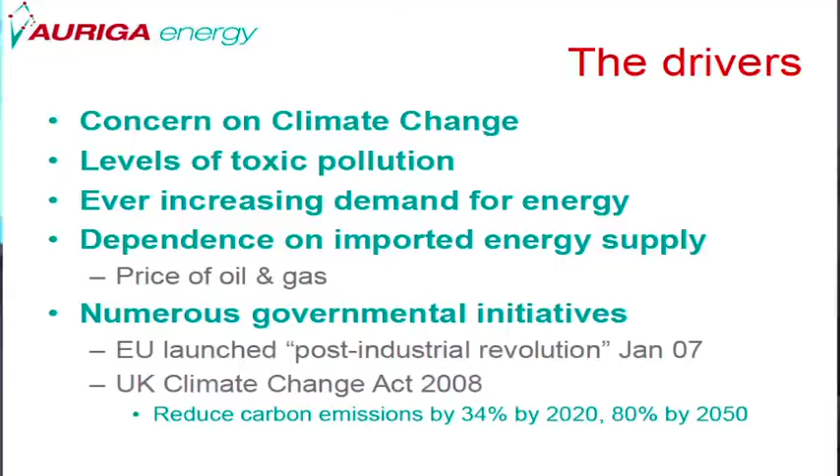So the governments have recognized this, and I left my day job at the end of 2006, and Jose Manuel Barroso must have heard about it, because he got up on the 12th of January 2007 and said he's got to help me out. He launched this post-industrial revolution to start what he said would be the green industries for Europe in the future, because we need a new industrial revolution, because all of our traditional jobs and industries are now migrating naturally to parts of the world where they can do them much easier, much cheaper, and not worry about health and safety all day long.

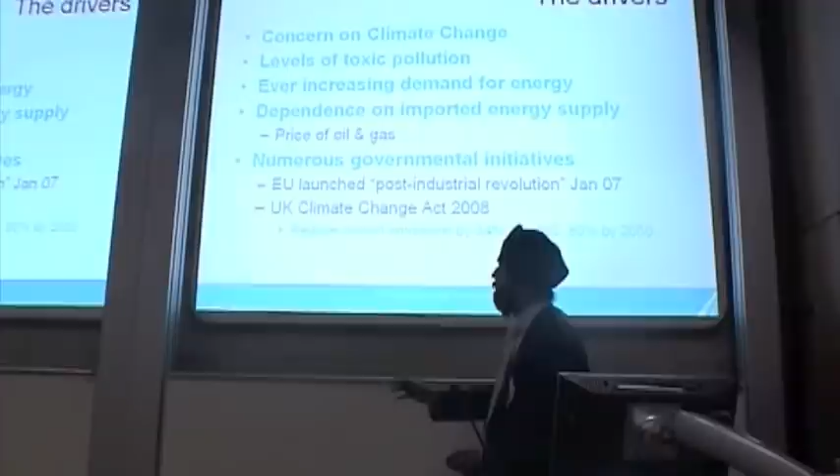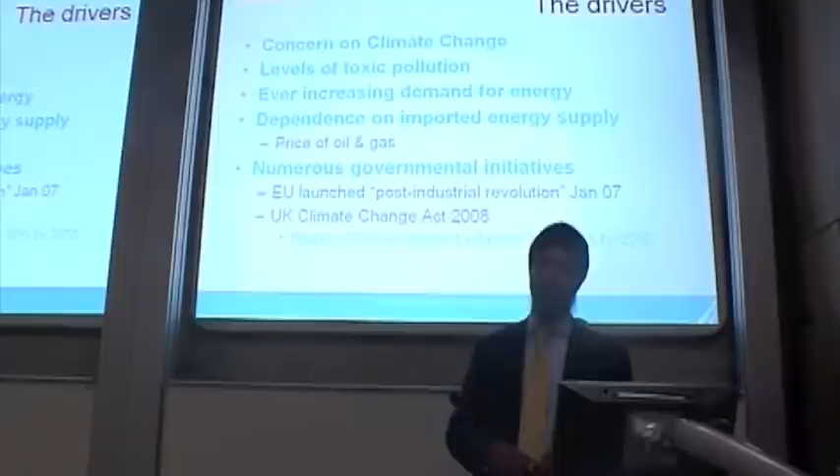Following on that, in the UK, we passed the Climate Change Act in November 2008, and that gave us these numbers that we got to meet: reductions in carbon dioxide output by 80% by 2050, far enough away not to worry about it. But 34% by 2020, all very easy when you're in a recession, because everybody's industries are switched off and things are down. But if we get our normal growth back, that's a nightmare. That's very difficult to achieve. So we got to, as Rex just said, get out there and do something and actually do the business. So here we are.

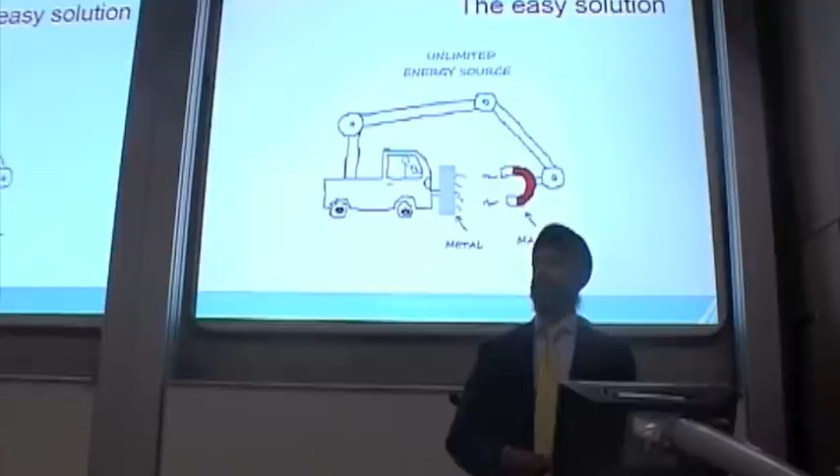The answer is easy. I don't know why anybody doesn't follow the answer. And being in the materials and metallurgy department, I think I'd get on with it.

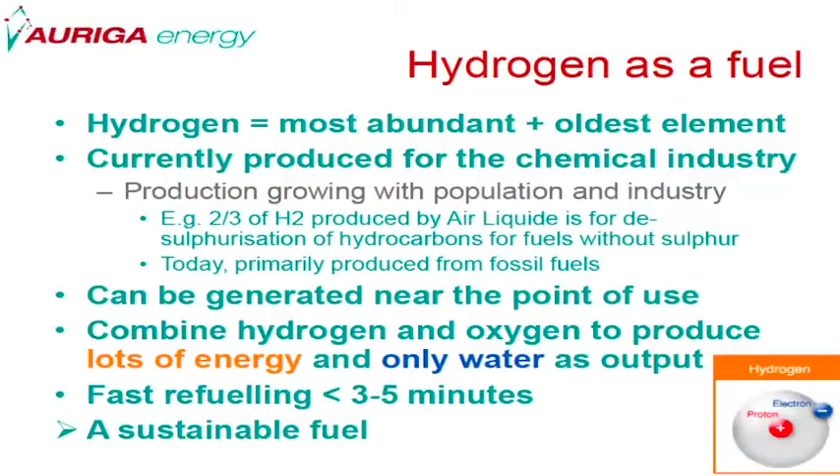So hydrogen is what we're talking about, and it's the most abundant element in the universe. There's plenty of hydrogen. We'll never run short. We won't have to fight wars to try and get hold of it. All the gas companies tell me is that the hydrogen that we consume, that I buy from them, that you buy from them now, is in essence a byproduct of their other industries, of the chemical processes in the chemical industries and in the oil refining industries and the fertilizer industries and all that. So in principle, there's no such thing as manufacturing it separately. You could almost, because it would go to waste if we weren't using it, capture it for free if you turned up at their refinery and put a little jar over their flare point. Is that right, Stuart?

Perhaps not. Anyway, ITM will tell you in a minute, later on this afternoon, that you can generate the hydrogen at the point of use by having your electrolyzers there, and then using wind energy and solar energy and waste recycling, which is my favorite, by the way. And you know about fuel cells, you combine hydrogen and oxygen and you get water as exhaust, so there's nothing difficult about that.

So to me, it is a sustainable fuel, and it maintains the versatility of the current fueling systems of oil-based diesel and petrol. And we're talking electric boats, when you talk about electric vehicles, somebody should go and look at the film Who Killed the Electric Car? And it's the oil companies, the most powerful entities on earth. And they're not bad people.

I know a lot of people who work in the oil industry. They're friends of mine. They're just like us. They're doing a job. They need jobs. So you don't want to put them out of a job. You want to change their mode of operation so that they survive. Their distribution networks survive. They manufacture hydrogen. All the versatility of a car and a boat and everything else is maintained. It is a sustainable fuel. So that's why we're doing this.

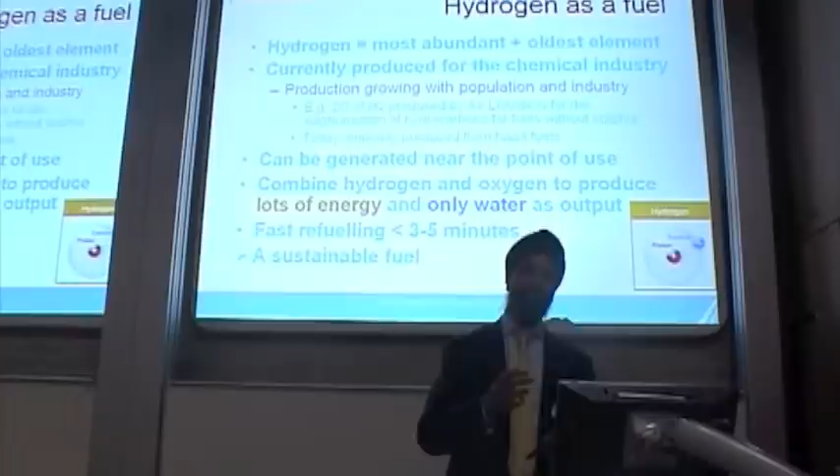What are the key challenges? Well, it's the old chicken and egg. There's no one manufacturing enough hydrogen, and we can't deliver it. There's no supply infrastructure because there aren't any products to use it. We don't have a supply chain, and as was mentioned earlier on, the marine industry does not have people with screwdrivers. They have people with spanners. Simplistically speaking, we need a service industry who can handle hydrogen, the fuel cell electrical systems, and be able to maintain them and repair them.

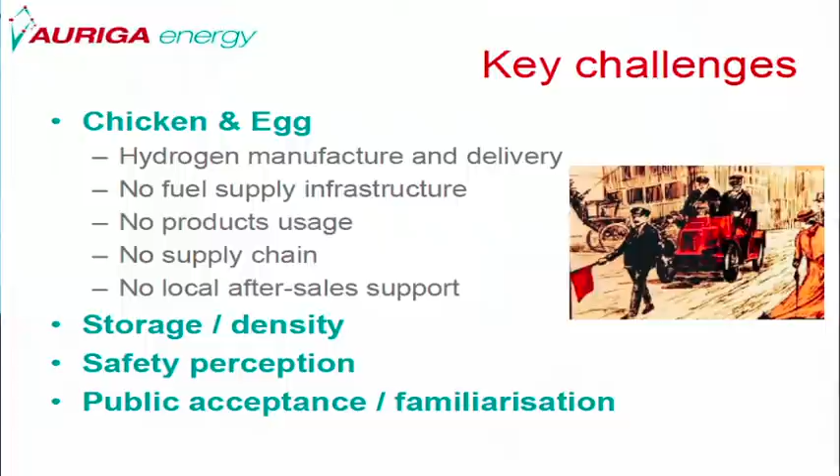Rex's business and the business of this department is sorting out the storage and storing hydrogen in a good density. That's beyond my capability, so I leave that to the experts there.

And the safety perception - we are always worried about anything new, and there's a public worry about safety of hydrogen. The Hindenburg gets mentioned when nobody else can come up with any rational argument, so you slap your hand over your forehead. We've got to bring the public up to speed and make sure they're familiar with these new technologies we're deploying. So bearing that in mind, I came up with this project idea to get it out there and bring it to the public so they are comfortable with it.

This is where I perceive we are at the moment - we're at the red flag. In building my hydrogen systems and trying to get them out there, it's taken years to get to this stage. I keep coming across people who say we need people walking with red flags in front of you because this is really dangerous, we shouldn't have it. So what we've done is produce our hydrogen fuel cell systems and target them for a variety of market areas where I find there will be good traction to get it out there in public and make sure that it picks up.

And the first one is for use on the water, in the marine industries for ferries and canal boats. I lobbied hard with Bristol City Council since 2003 and finally got them to issue an ITT. We put in a bid and we won that, and we are here building the fuel cell ferry. I'll talk about that in a minute.

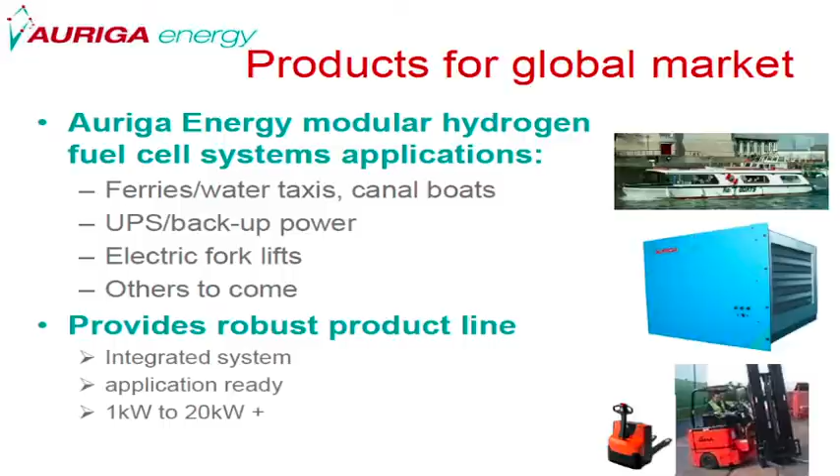In parallel, we've been developing our UPS backup power systems, which we launched earlier this year in January, and they're out there in operation. We're working on electrical forklifts and other products to come.

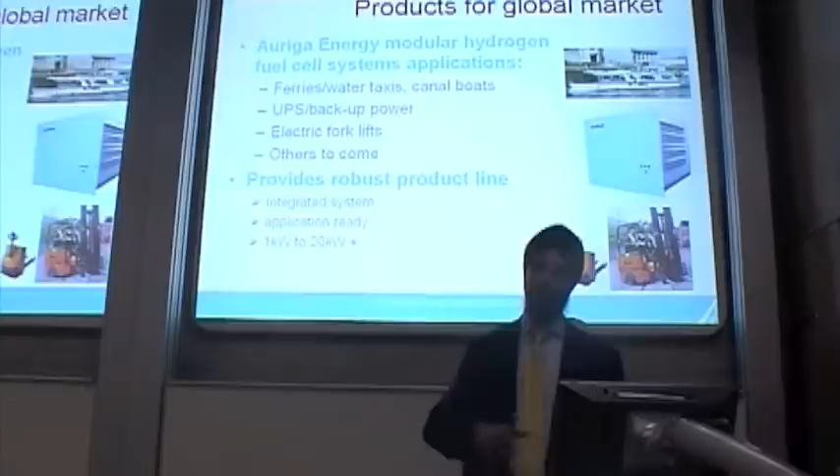So we're building our fuel cells - I said 1 kilowatt, but we're actually down to 0.5 kilowatt now because a particular customer demanded it. We've got a modular system which builds from 0.5 kilowatt upwards, and we're in discussion with a customer. When it gets up to somewhere near 100 kilowatts, then we're struggling, but that's about the limit of our system as currently defined - we build up the modules.

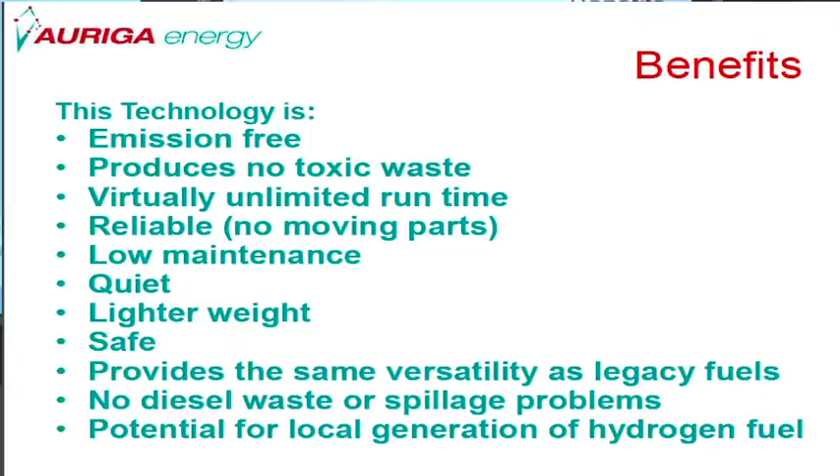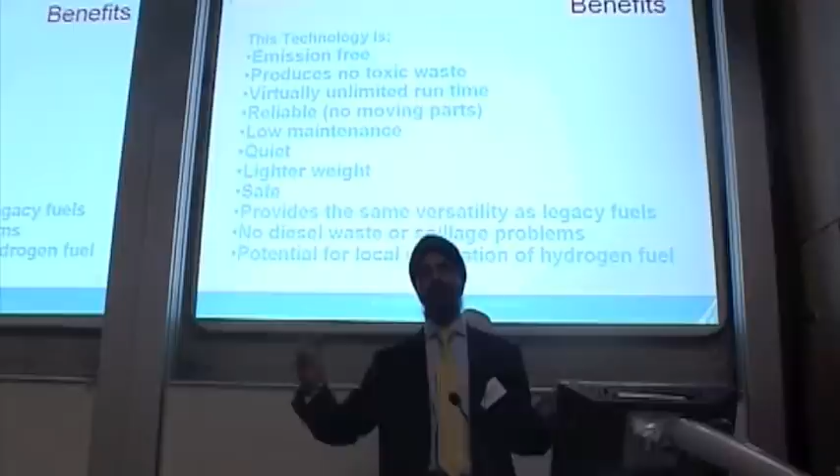So what are the benefits? You know about this, I'll quickly run through them: emission-free, no toxic waste, gives you the versatility of current petrol and diesel systems with refueling, virtually unlimited run times. Reliability was mentioned earlier this morning, and fuel cells are reliable in that they work, but everything - this laptop, this microphone - has a lifetime. So at the moment the challenge with fuel cells... actually I don't think it's a challenge because some of the fuel cells we use now do produce a long life. But the general challenge for the fuel cell industry is that the number of hours they work is considered limited.

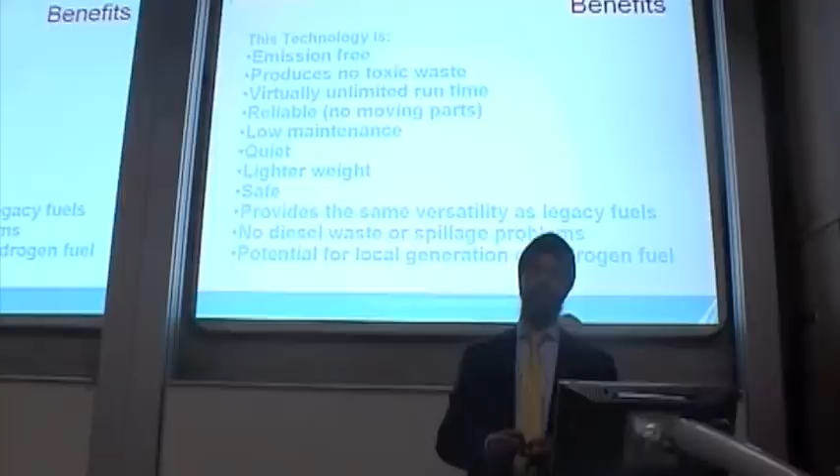But then they can be easily recycled and replaced. There's low maintenance, no moving parts to replace. They're quiet, of course, being electrical systems, and lightweight - which is a pain for trying to put them into forklifts where battery systems and engine systems are currently used as counterweights. Also in the boat industry, we put our kit in the boat and say, hang on, this is now a little too light, we've got to balance it out, put some ballast in, and to get it under that bridge we need it sitting lower in the water. So it's not always a benefit to be lighter.

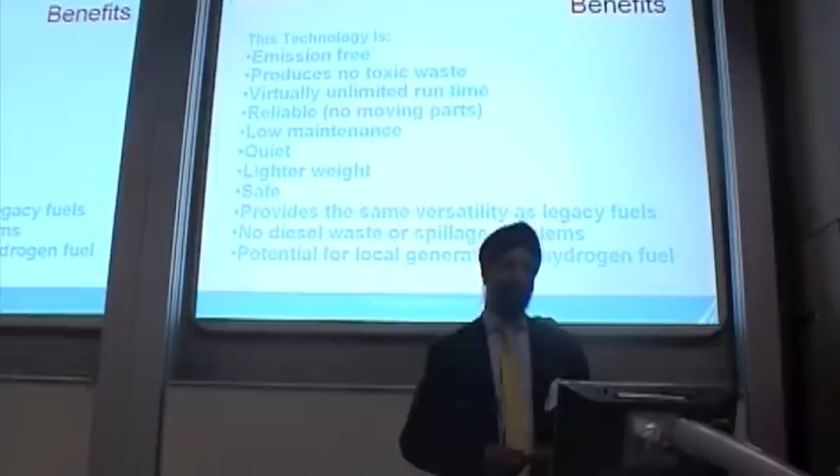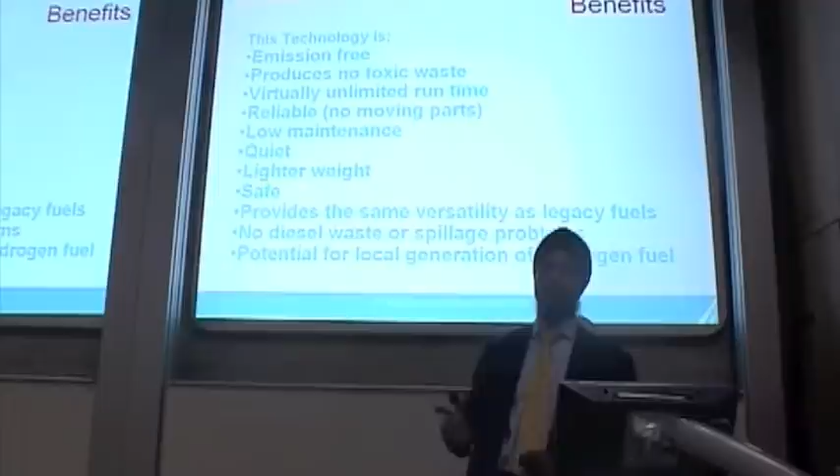Safety - well, they are safe. And I'm glad to see that everybody was out there looking at the 3 or 4 fuel cells that are operating out there, and nobody's panicking and running out the door. So we're all obviously comfortable with the safety of these systems. Well, I've said the rest, so let's move on from that.

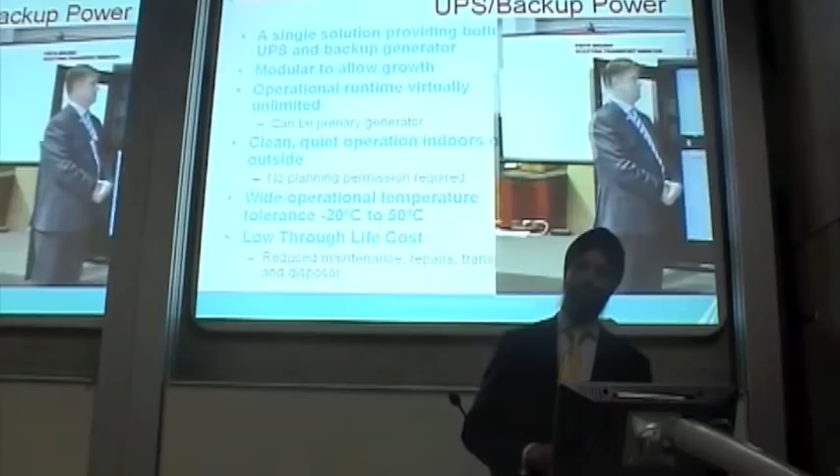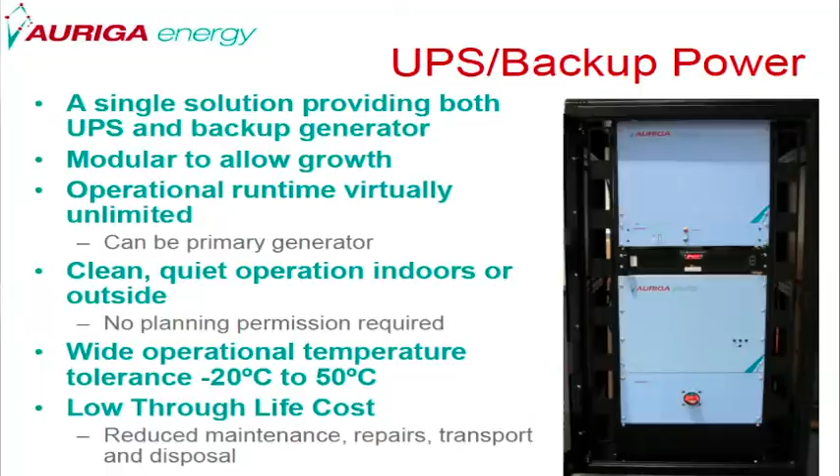So this is our backup power system, which we launched with our partners, Linnet Technology, UPS installers, in Stirling at their headquarters back in January. It's mounted in a UPS in a 19-inch rack system, and what you see there is 3 kilowatts, giving you all of the benefits I've outlined. And we've done the cost analysis - if you analyze these systems on a through-life cost basis, the costs are comparable with the systems they're replacing.

So we're talking waterways.

When the world talks about worrying about global warming and CO2 emissions, people talk about trying to stop you flying, stop cars, let's stop flying, because that's the obvious visible emitter of CO2. But what's missing is that people have taken their eyes off the waterways and ports. If you stood on a hill overlooking a port, you would see a sulfur bubble, just as you would if you stood on a hill overlooking an airport or a city.

It's just a big yellow bubble. I've got lots of reports of analyses done of port pollution around the world, mostly in America, because they do a lot of analysis on these ports. This particular analysis done by the NRDC, the Natural Resources Defense Council in the US, looked at a port, I think it's Santa Barbara in California.

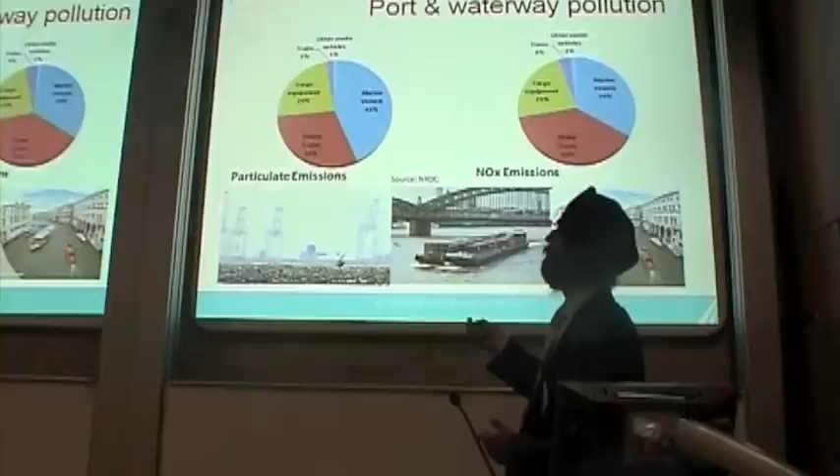Their analysis shows that marine vessels are polluting about a third of the particulate emissions, 40%, and a third of the NOx emissions. Then you've got the heavy trucks going in and out and the cargo equipment. And the thing that the general population and the politicians are focused on is that 1% - that's the cars going in and out of the port. So you're missing all of that and focusing on that. I think there's something missing here, and we're here to address it.

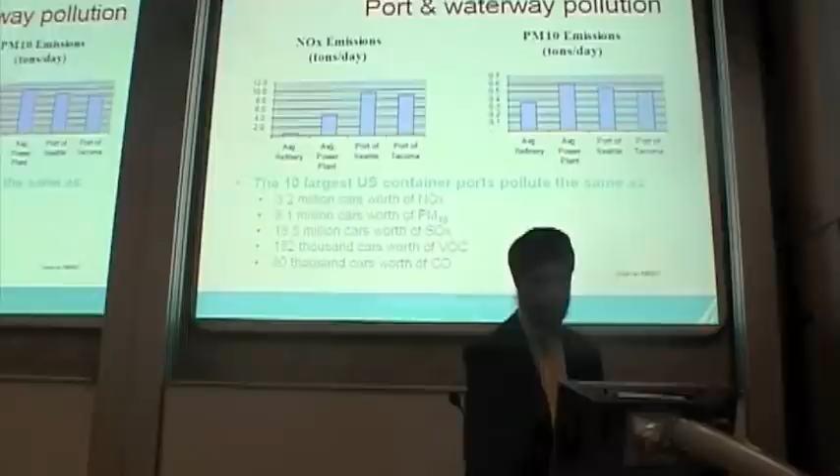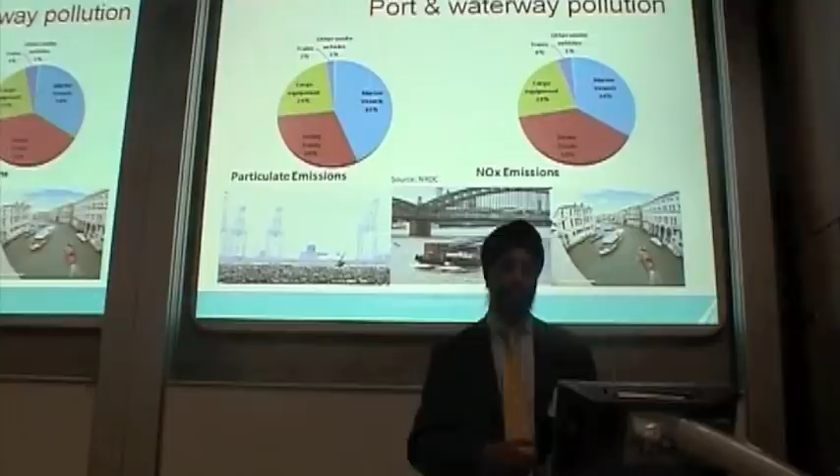There's also barges, and there's another report I have on the pollution level in the Rhine and the Ruhr. The Rhine and the Ruhr is used as an industrial highway for transporting goods in the industrial belt of Central Europe. So this is the analysis taken further.

So if you're thinking you're trying to solve a problem - the problem that the world is coming to an end because of global warming, temperatures rising 2 degrees, and we all fry - why not, rather than sticking to our political guns that we want to stop people flying and stop this, that, and the other, address the problem and say: where can we make the biggest difference?

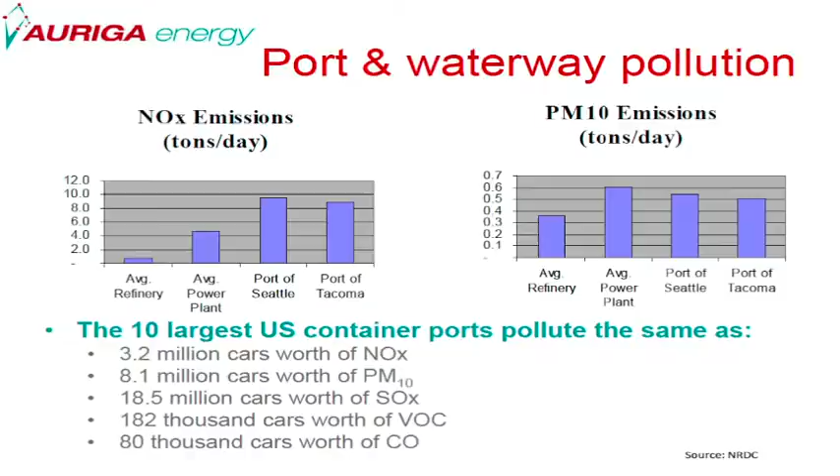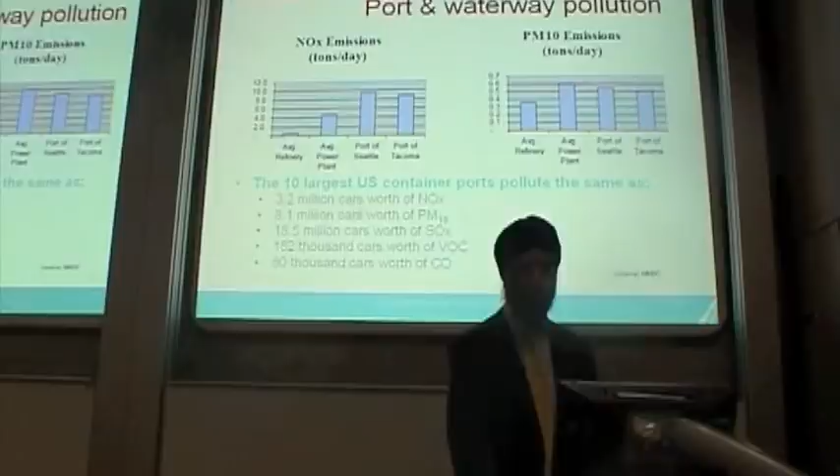So this is the analysis in America, and they're saying that if you sorted the problem in the 10 largest container ports in the US, you would achieve the same as changing millions of cars to a different type of fuel or different mode of transport. So that is what we need to do - address this point and solve it with a bigger step than the small steps we can do with changing people's mode of transport.

Then there are treaty commitments. The MARPOL Treaty, the Marine Pollution Treaty, was signed in 1973 by 125 or so countries, all the countries of the world that were there at the time. Annex 6 was signed in 2003, and that is a commitment by all the signatories that ships built after these dates will reduce their sulfur content to almost nothing.

Tier 1 countries are the rich countries, Tier 2 the intermediate countries, and Tier 3 the poorer countries, and they get up to 2025 to sort themselves out. The richer countries have to sort themselves out from now - this year, last year, and 2010.

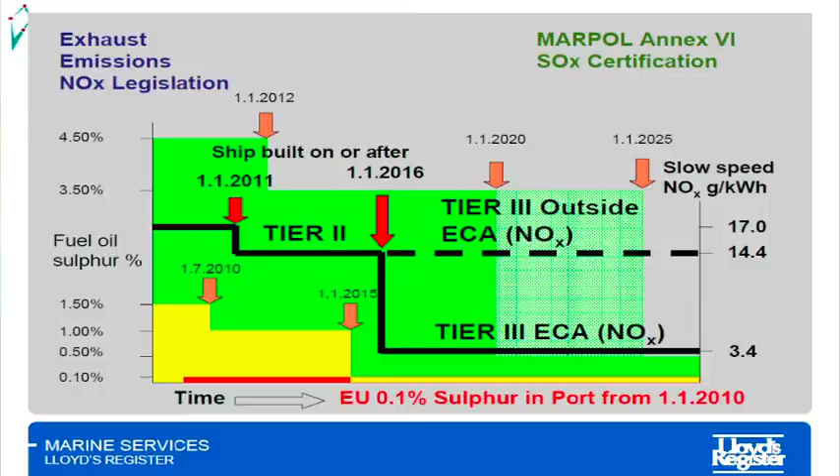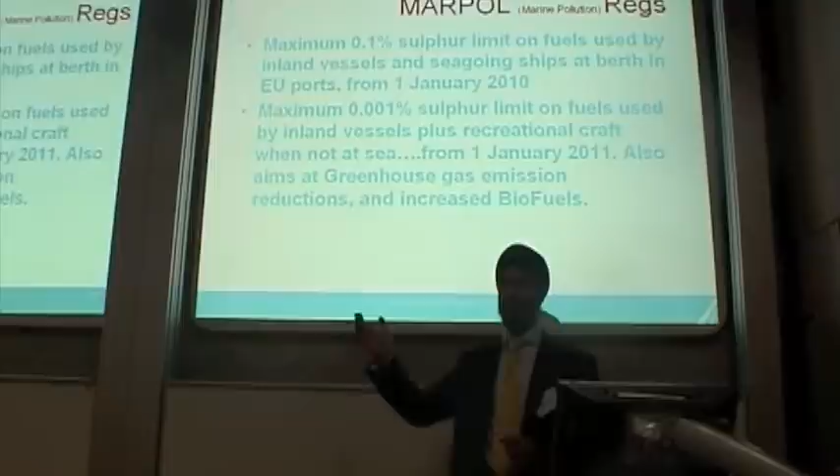And this is the exact wording of the legislation as it is written in EU legislation and in the UK legislation and every other EU country's legislation. These are the words that state you have to reduce them.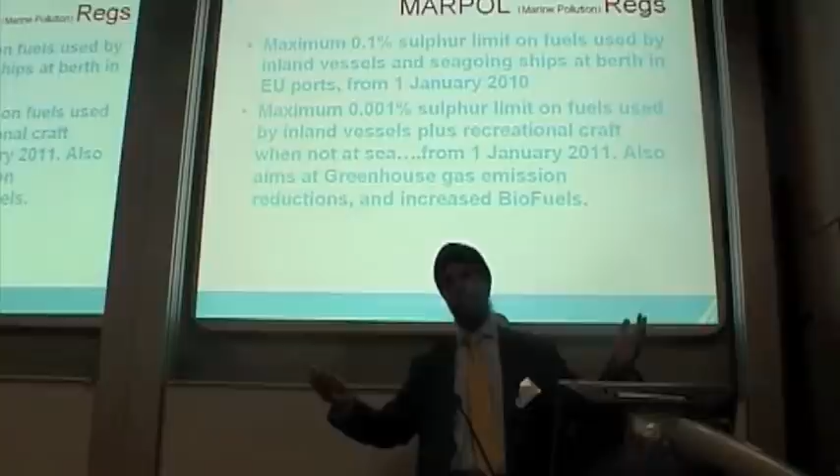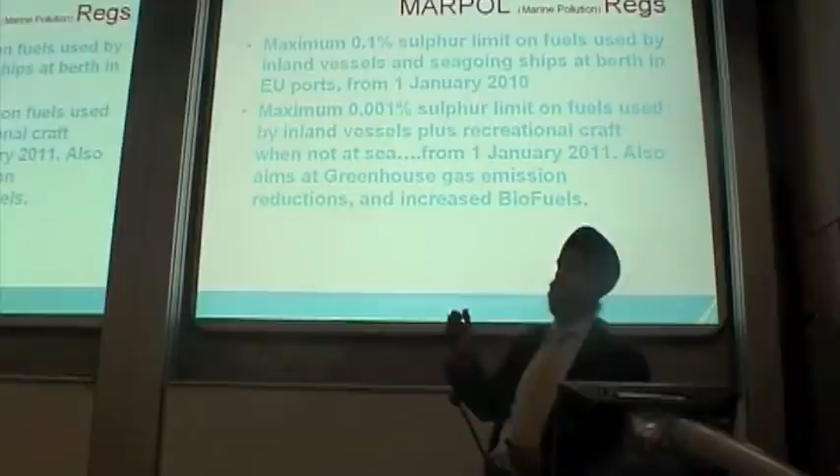And here where they've got the dots, that's me taking the words out, because there's an endless list of - what happens is people are looking for loopholes in the law. That's a list of all the cars and lorries and buses and tractors and lawnmowers, anything that uses ports. So they listed them all to say, oh, hang on, mine's not a ship, I'm okay, mine's only a boat. And I've had that argument with another guy - he said, oh, yours is a boat, so it has a different rule to ships. Yes.

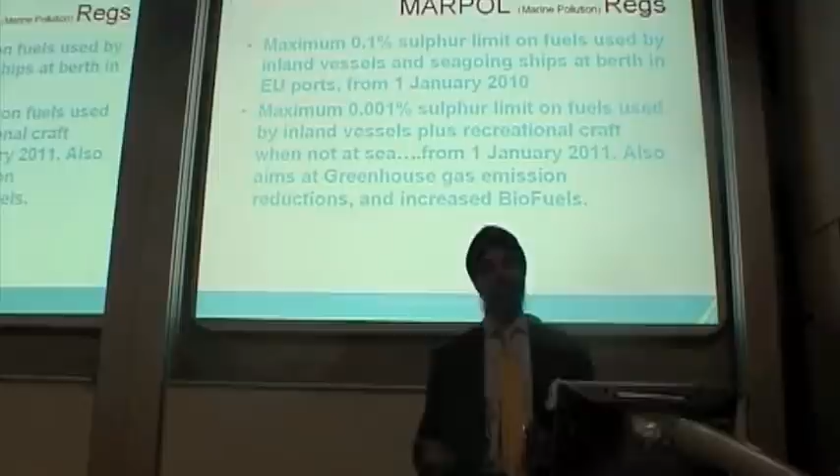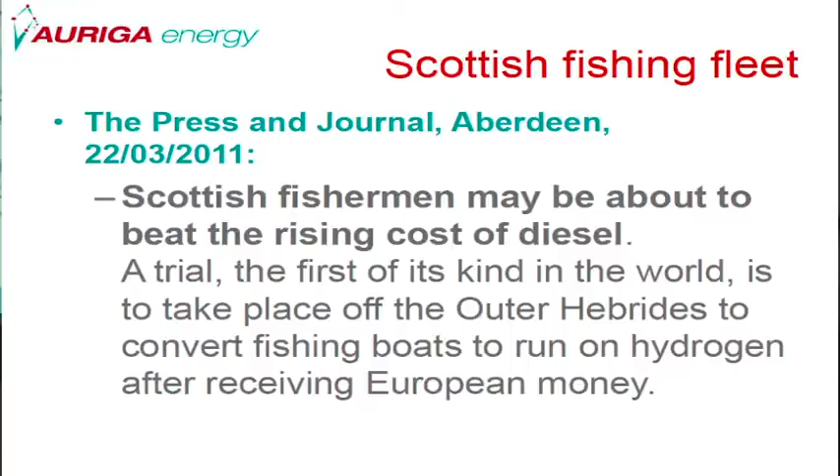And then there's the economic argument, and the fishing industry has been struggling for many years. All of my life they've been moaning that it's just too hard to survive. So with the increasing price of diesel, they've had a bit of a problem, and Scottish fishermen got a grant out of the EU to try using hydrogen as their fuel to reduce costs. So everybody is looking for some way out, and hydrogen seems to work. This is not putting fuel cells into their trawlers - this is burning hydrogen in their current combustion engines.

So we've got a problem to solve. How do we solve the problem? I say we find the quickest and easiest solution to the problem and keep a focus on where you want to get to. All the men cross their legs at this stage.

So the Bristol Hydrogen Ferry project is designed to demonstrate the viability of fuel cells in ferry operations - that's stop, start, and operations on a daily basis. The question was asked earlier, and Alex said that the Ross Barlow is only used for experimental work, they haven't done all this continuous running, stop-starts and all the rest. So this is where we will know how it operates in a ferry bus type operation.

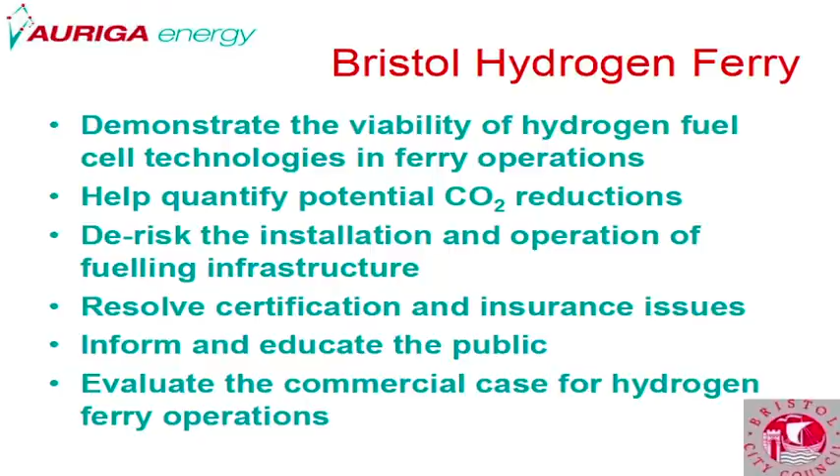Where you're going from stop to stop, picking up passengers, in all weather conditions. We want to quantify the CO2 reductions that we can make with this boat compared to the diesel boat that we'll be replacing, and then project that if all the boats in Bristol Harbourside were using this sort of technology, what is the potential saving? That gives the politicians we just had in the room a focus.

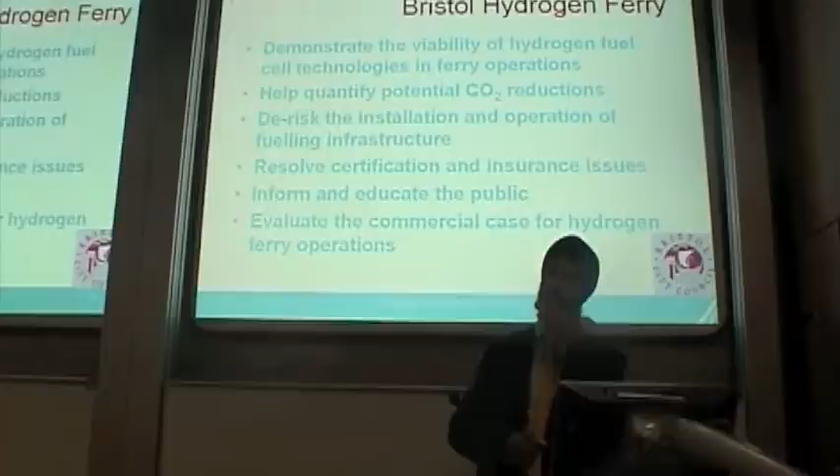There's something we can do here, we can achieve something. The biggest problem I've had is de-risking the installation and operation of the refueling infrastructure - where do you put the refueling station, how do you sort that out?

Then the certification - earlier on it was mentioned there are no certification rules, no insurance rules. You make a boat, you go online to whoever, money supermarket or wherever you get your insurance from, or when you buy a hydrogen car, you phone up Direct Line and say, I've got this hydrogen car, what's the insurance premium? And they'll say it's not on our list. So what is it? It's a hydrogen car. No, it's not on our list, sorry, can't insure it. Or we'll invent a number - how about £5,000 a year or something like that?

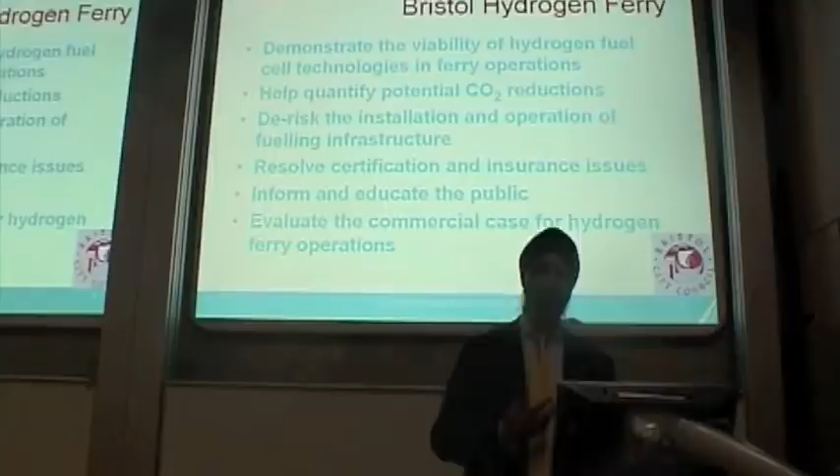So we need to resolve these issues, they're end-to-end, related issues. We want to inform and educate the public, and we want to build a commercial case for other operators in Bristol at least and elsewhere.

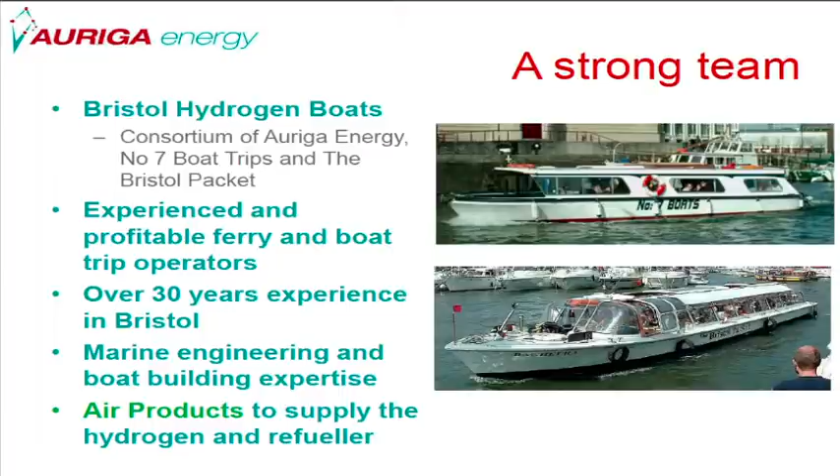So we brought together a strong team, and our joint company is called Bristol Hydrogen Boats, a consortium between ourselves, Auriga Energy, Number 7 Boat Trips and the Bristol Packet, who are operators of ferries and boat trips in the Bristol Harbour, and they've been there for many years. And Air Products came to us offering their services to supply the refueler, so they are partners in this project in supplying the refueling infrastructure.

Being a council-funded project, we can't afford very much, so that's the boat. It's a steel construction. We didn't have a spare boat that we could modify, and if you modify a boat, you take out its propulsion system, it loses its certification anyway, you have to recertify it. So why not build a purpose-built boat with all the right safety bulkheads and all the separations you have to do. It's sized for 12 passengers because the MCA, the Maritime and Coastguard Agency, has very strict rules.

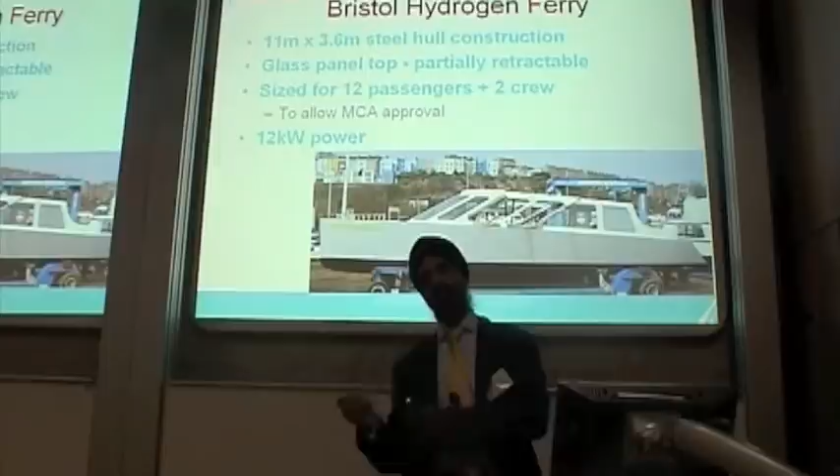We talked to them at the time of the proposal, and they said, well, we've got this set of rules, which is like a lever arch file that deep, for certifying boats greater than 12 passengers, and in there are hundreds of pages, and there is no mention of hydrogen, no mention of fuel cells, thousands of mentions of diesel and engines and things, so therefore they cannot certify it against those rules, and there are no rules for hydrogen. So chicken and egg - make it under 12 seats and then you can do what you like with it.

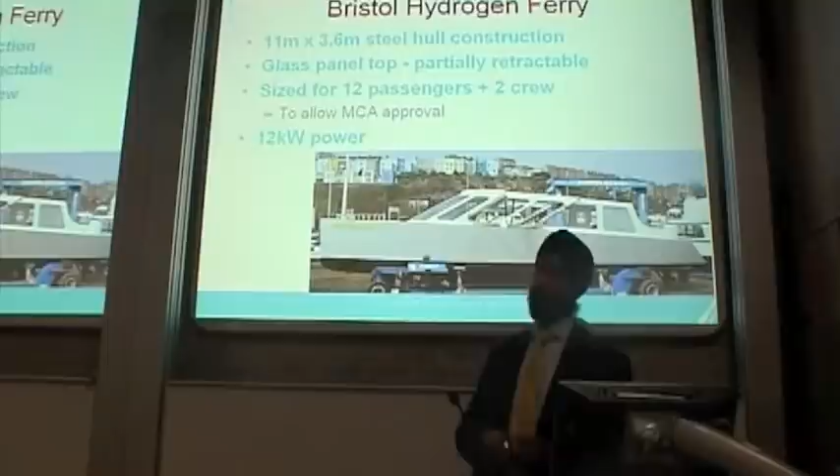It's a steel hull boat. We sized it to power 12 passengers, and we think it needs 12 kilowatts, so we're installing 12 kilowatts of our fuel cell system on there, and that is it.

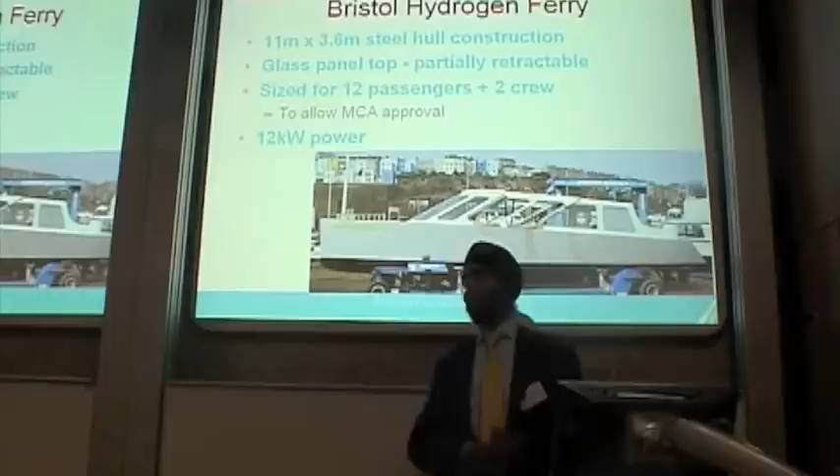It's a steel construction boat, just very close to its final fit out now. We're completing the system, and it should be launched sometime in July.

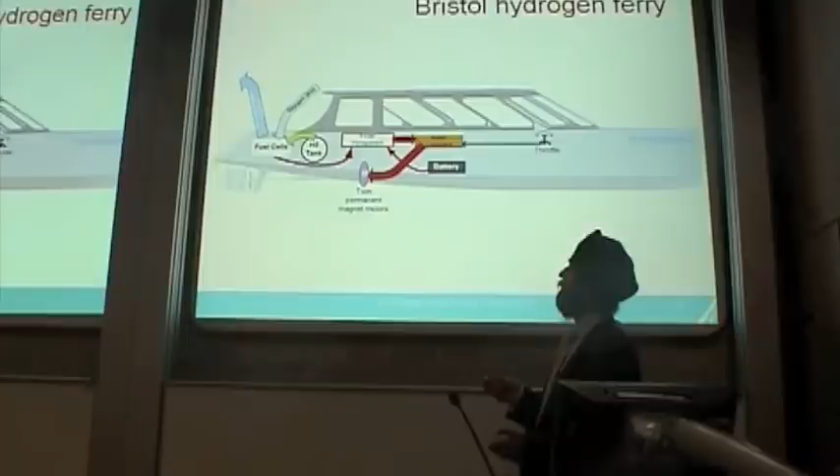That's the construction where we have our fuel cells in the back compartment. There are 4 times 3 kilowatt fuel cells, so it's 12 kilowatts on board. Got our air intake and our exhaust of the water vapor plus the purged gases, and a carbon fiber filament wound tank which holds 4 kilograms of hydrogen at 350 bar, so that we can use a standard - or what was a standard when we started this project - the standard car refueling kit, 350 bar, and we have room for a second tank in there, but we can't afford it.

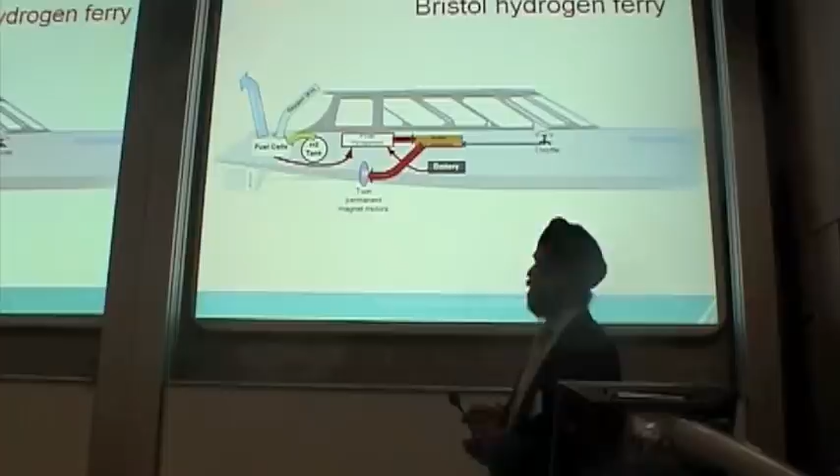We have our own power management system, motor controllers, and 2 Lynch motors, permanent magnet motors, which are powering the propeller. A battery for the buffer loads for the peaks and troughs, and of course we control it all from the front with our throttle. That, simplistically, is the Bristol Hydrogen Ferry.

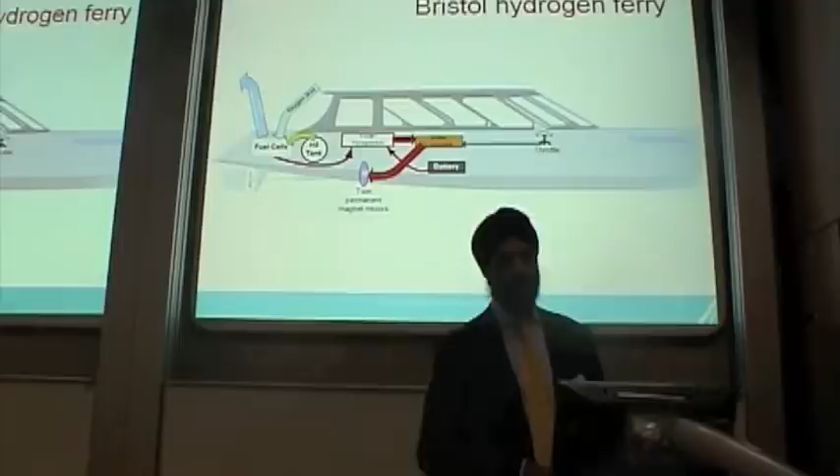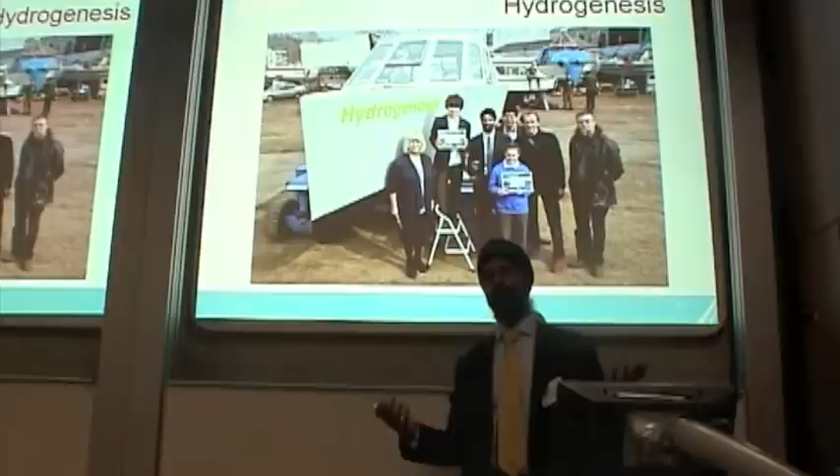We had a naming ceremony a couple of months ago. Being a council project, they ran a competition in all their junior schools, asking kids to put forward names for this project with a reason for the name. 142 names came forward, and we picked the one we liked: Hydrogenesis, suggested by this young lad. He won a prize and a certificate. His reason: Hydro for hydrogen, and Genesis being the first of.

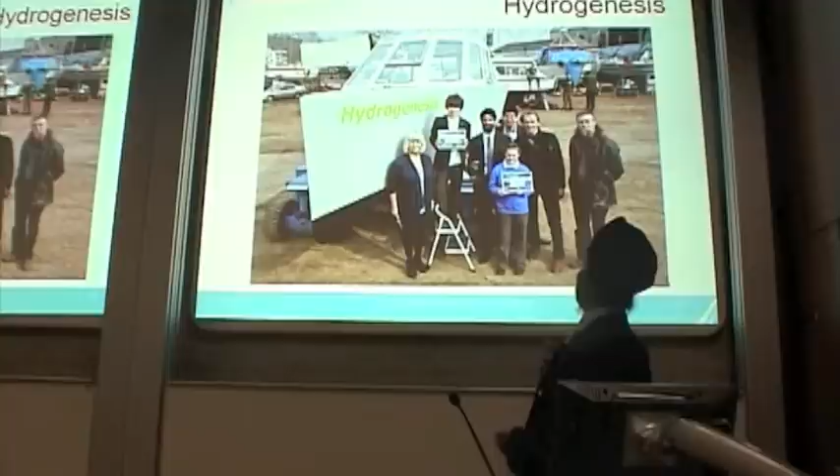Clever young lad. So we had this naming ceremony as the council leader, with my partners from the boat operators, the boat builders, and the representative from Air Products.

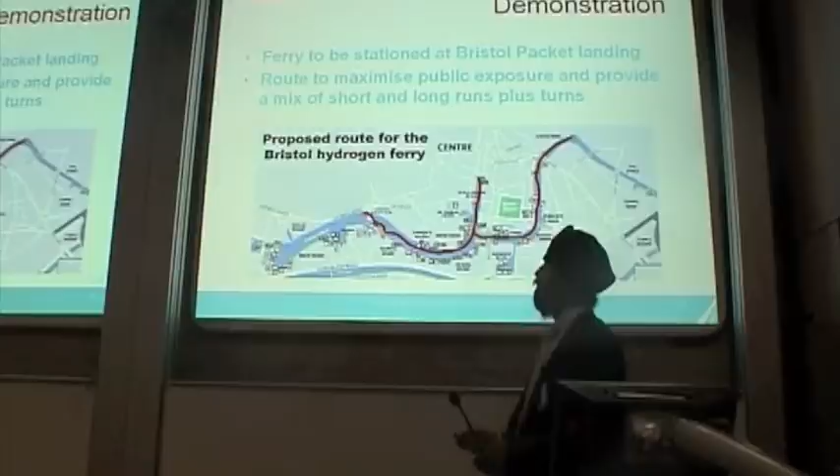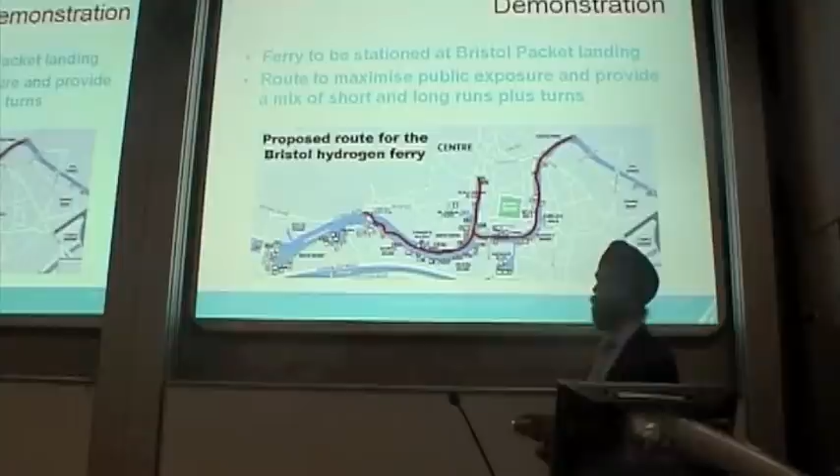Our demonstration route will be in the centre of Bristol, where we're operating from near the SS Great Britain, going round to the centre and up to the shopping area, going backwards and forwards on the daily ferry routes. The refuelling station is beyond here, just out there somewhere.

We've had some early success. The Sustainable Shipping Group gave us the Environmental Innovation of the Year award last year, which gave us a nice boost and some recognition. This group is composed of some big names - in the shipping world you've got Maersk Lines, Lloyd's, and numerous other big names. So we're getting the word out there, and these awards help with that, as well as boosting our confidence.

The challenges we need to overcome involve the refuelling location. It has to be in an area accessible by the public - we don't want it hidden away in some industrial no man's land. We want to educate the public and make them comfortable with it. I'd prefer it to be dual use, so we found a location with roadside access as well - if there were hydrogen cars, they could come up and use it too.

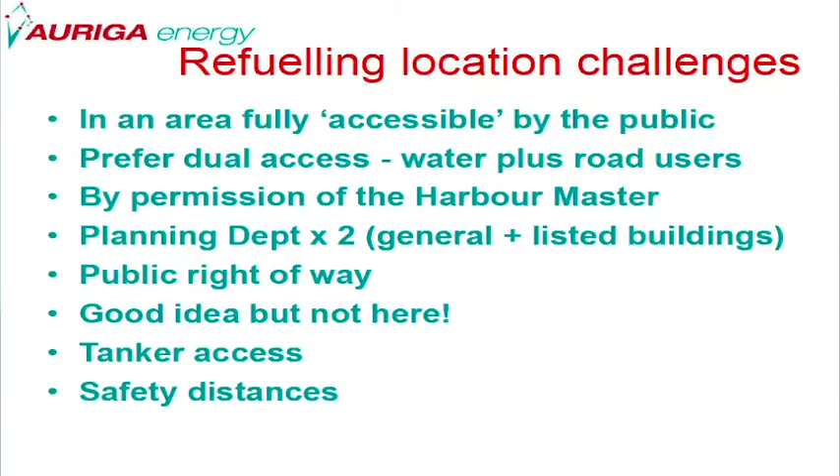Because if you don't have that, one boat doesn't provide a commercial case for keeping a refuelling station open, nor does one car. This is an unattended station - if you had to pay an attendant as well as ground rent and everything else, it's a dead duck. Everything has to be done with the harbour master's permission, since it's on the water side, which the harbour master controls.

We have to go through two planning departments in the council - a general planning department, and because it's a historic town with lots of listed buildings, even the harbour wall itself is a listed element, so we had to get through that too. And because it's on the riverside, any spare bit of land near the town centre is a public right of way - a path for walking your dog or having a walk yourself - so we're now blocking a public right of way.

In all these discussions I spent months and months going around talking to everybody. You give them a presentation, talk to them, and they say, brilliant idea, yeah, that's what we need to save the world in the future. Yeah, great - but not here though, can you put it somewhere else? So 'not in my backyard' applies everywhere.

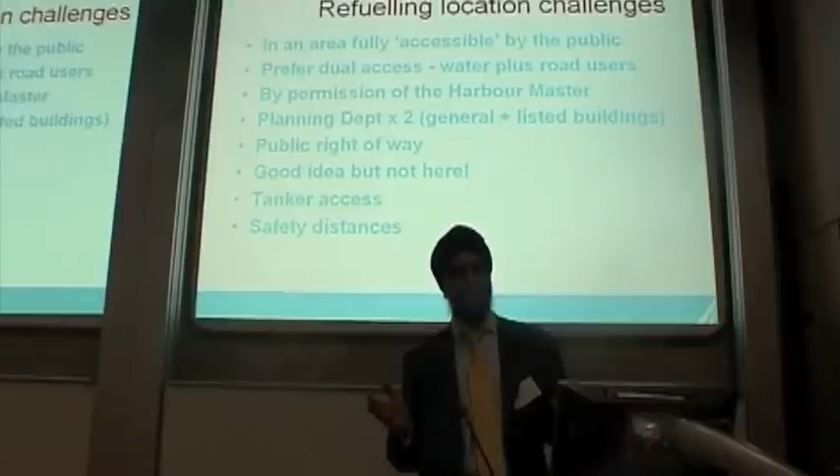Then there's the gas companies, and in a minute ITM - all these suppliers of refuelling systems have this fear of safety, and they like drawing big round circles around everything: 8 meters, 5, 10, 12 meter diameter circles. So you've got to find all this empty spare land to put this no-go area fence around, and then say, this is the future.

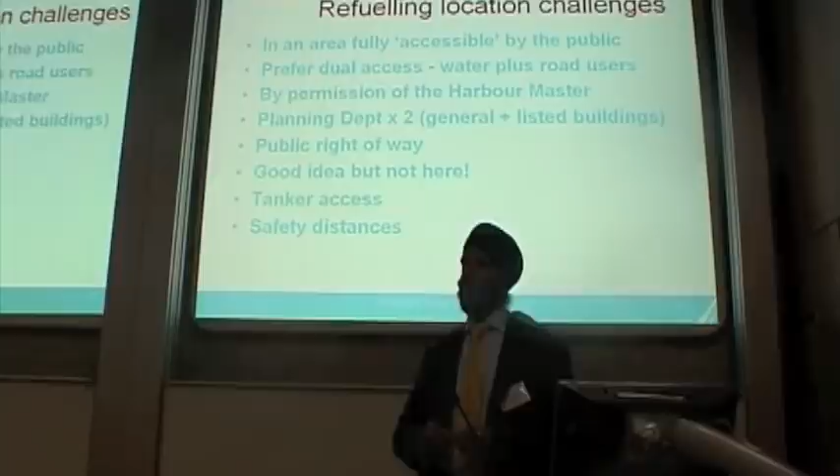I'm glad we were out there with 3 gas bottles being used, and none of you were screaming that there isn't an exclusion zone around those gas bottles. Thank you, Stuart - you yourself showed great confidence having your gas bottle. But if your guys were installing that gas bottle for me, they'd put a 3-meter exclusion zone around it. These are the sort of challenges we have.

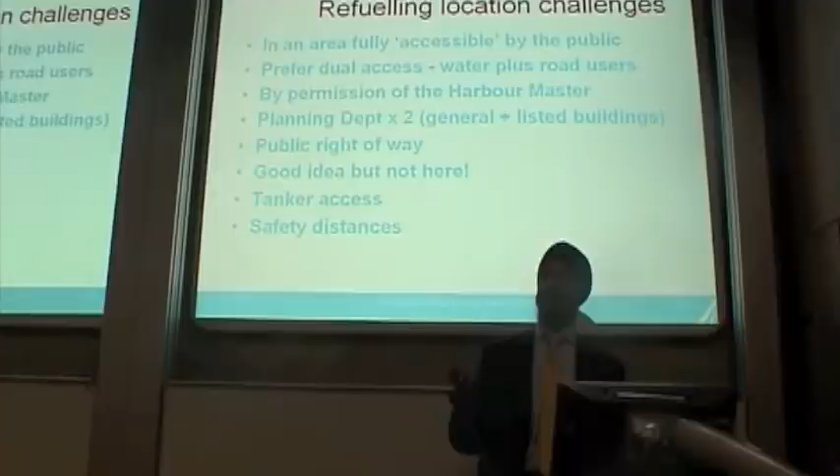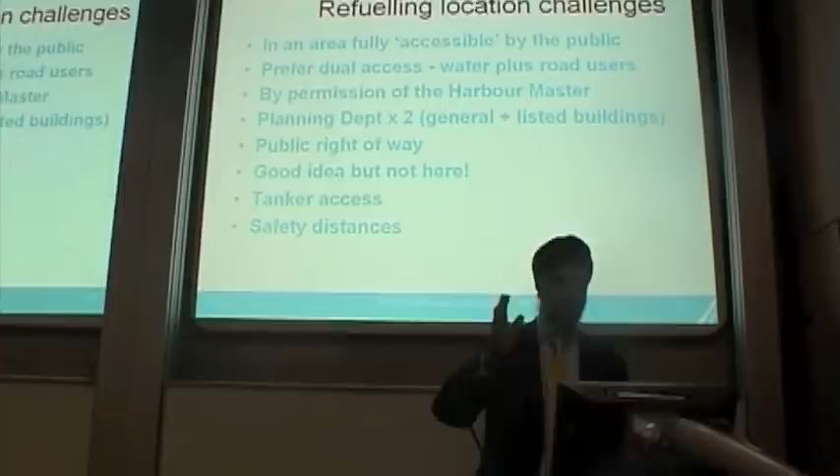There are, I think, new codes and standards, particularly in the US, that have been changing - basically infrastructure to put in place a standard refuelling joint where you don't have 8-meter diameters. So that will change. I look forward to it, but for the moment, it's a nightmare.

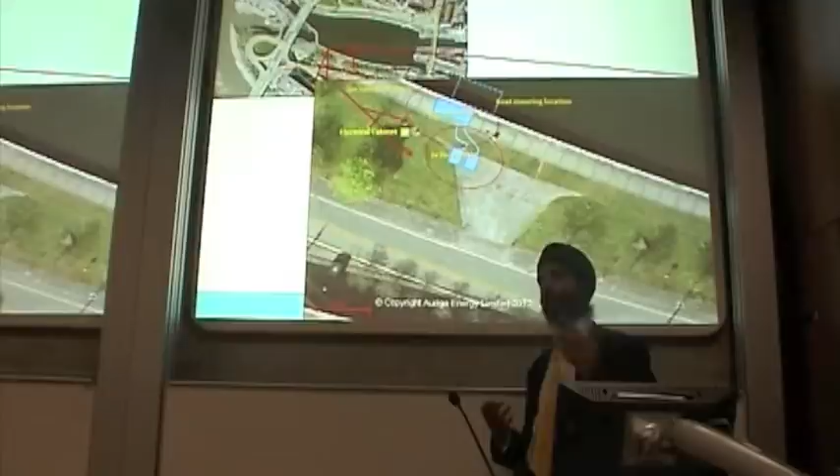In the middle of an empty field - yes, so this is where we have to find an empty field, right? At the end of the day, we want these refueling systems for cars in your local garage, in your local Tesco's, without any exclusion zones. You'll have 100 different cars coming in, some getting diesel, some petrol, some LPG, some hydrogen, and that's how the hydrogen economy is going to grow - not by finding empty bits of land, because there aren't any. If there are any, we should be building housing there, because we haven't got enough housing anyway. So this is where we are.

At the end of the Cumberland Basin, we found a bit of empty land that has roadside access for the moment. It's not for car refueling, because there aren't any, but for tankers to come in and refuel the refueler, and boats to be refueled on the water side. Whether this place is available or not, this is where I'd like the future thing to be, or something similar.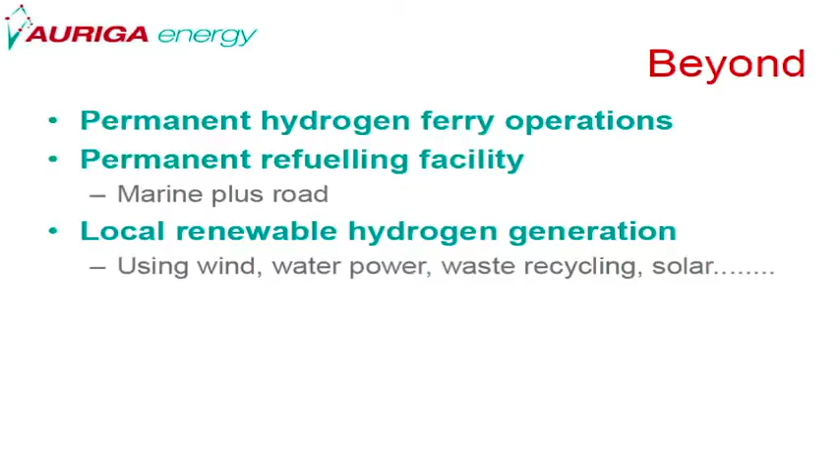So where we want to go beyond this is to make it a permanent operation. This is a 6-month project to get past all those rules and get it certified. We want to make it permanent so that it's always there operating and everybody's happy with it - put in a permanent refueling station. This is a temporary installation, and then we'll move to that.

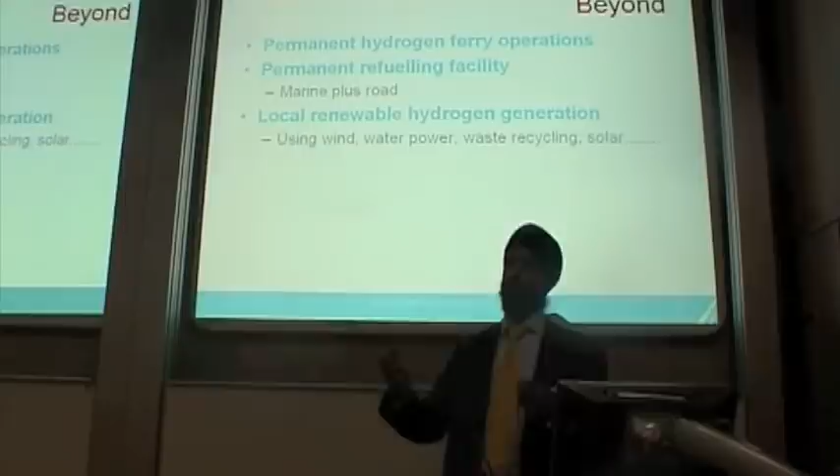And then we want to generate the hydrogen locally. Right now it's tankered in from miles away on a diesel tanker, which is generating CO2. So you can't go from where we are today to utopia in one step - we have to take it a step at a time to get there.

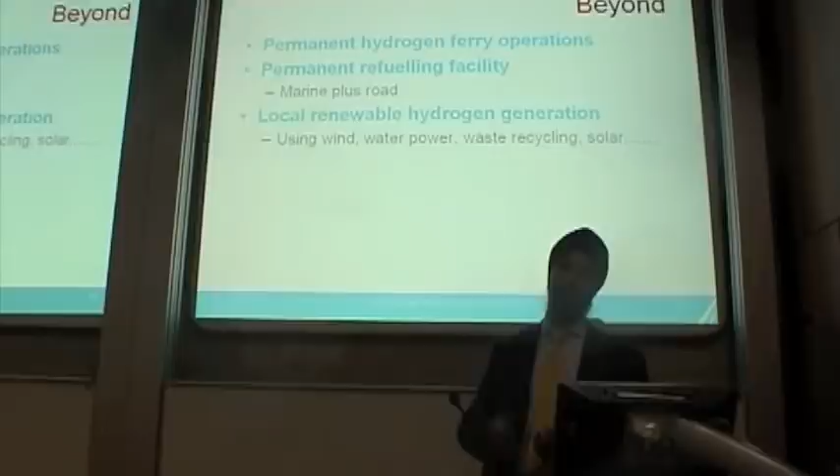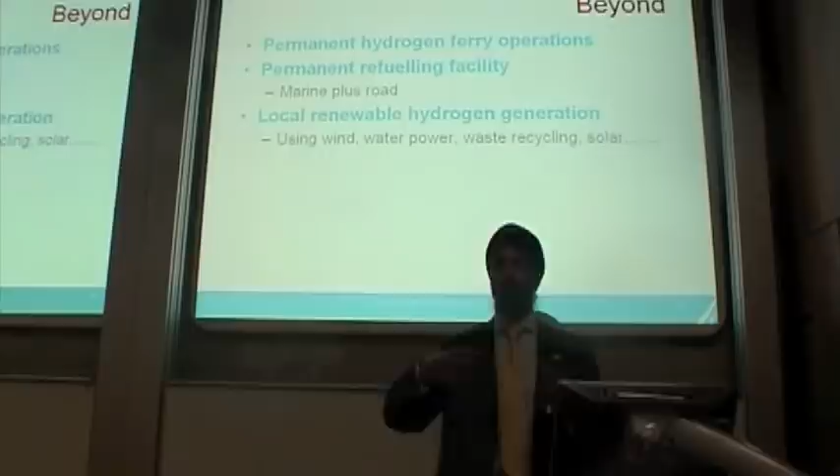So we've started discussions about generating hydrogen locally - the council owns a wind turbine, and there's a solar project going on in the city. There's a new waste recycling plant being opened in Avonmouth, and we're looking at water power as well, using the power of the Severn and the Avon as the source of electricity from which we can electrolyze, or generate hydrogen from waste recycling.

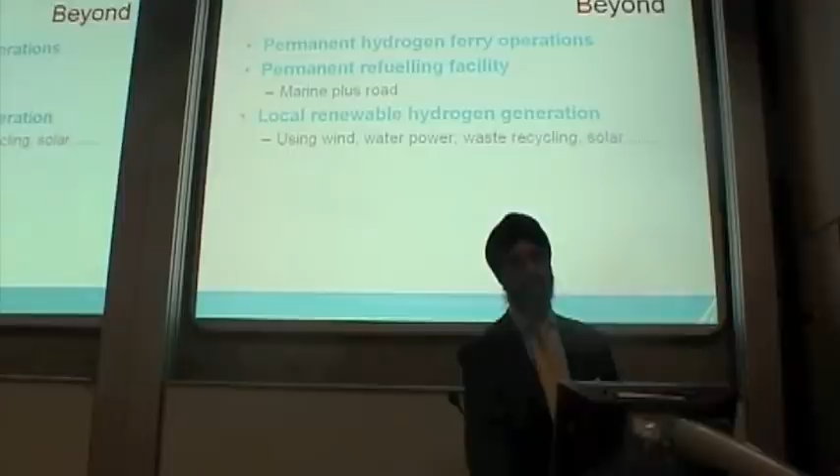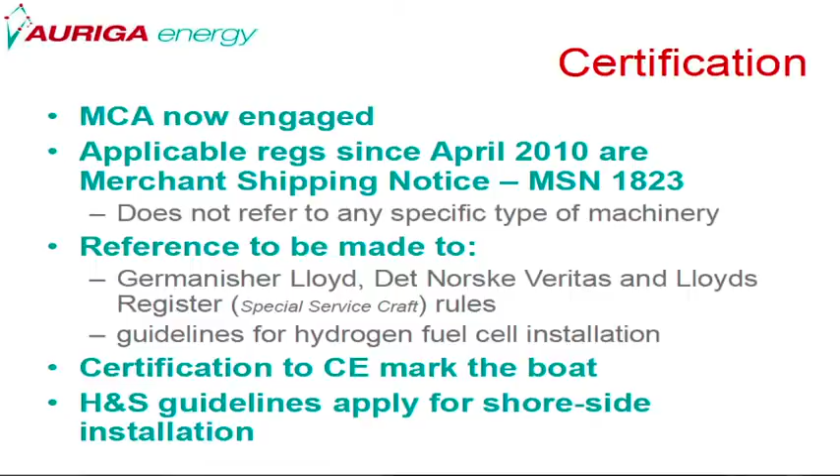Certification: the MCA has been engaged ever since we started the project. They've been in discussions with us and with the harbour master, who ultimately gives the certificate to operate in his harbour. The applicable regulations are the merchant shipping notice, which again is hundreds and hundreds of pages. We also reference the Germanischer Lloyd fuel cell installation regulations, written around the ferry in Hamburg, and the DNV ones, written around the boat in Amsterdam.

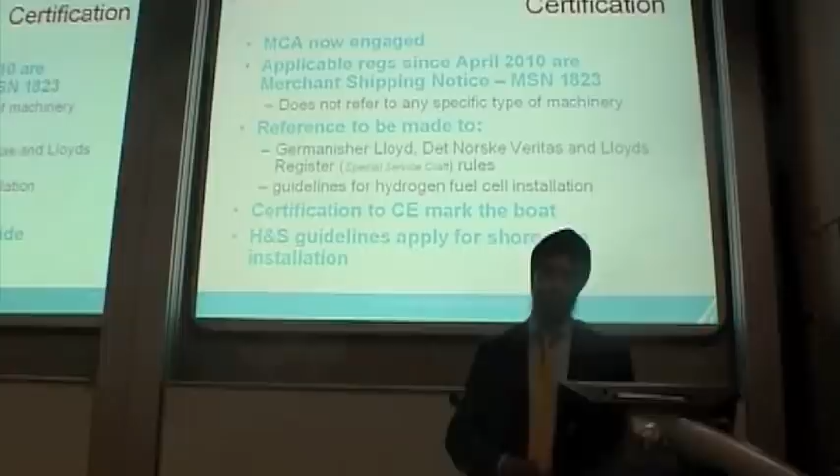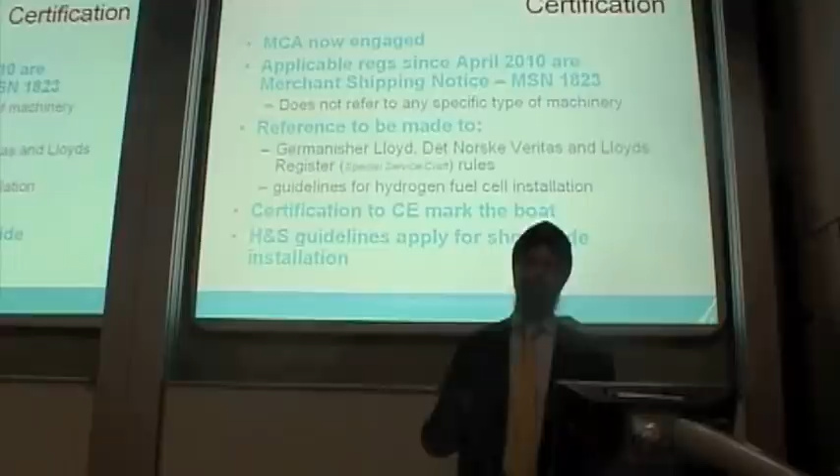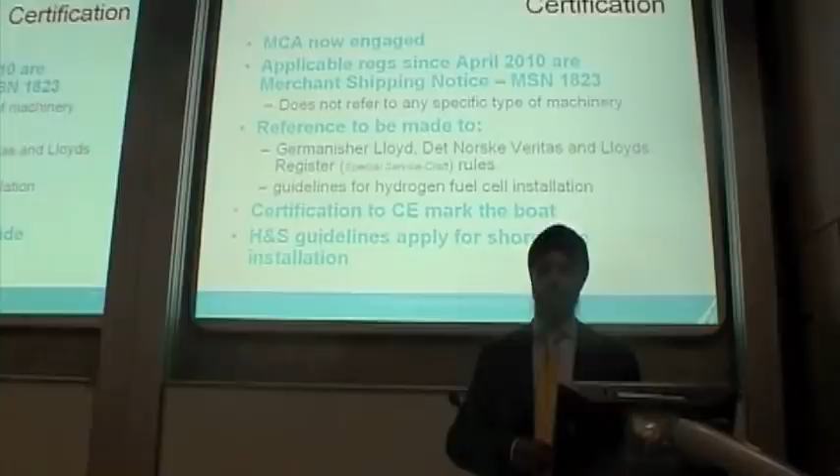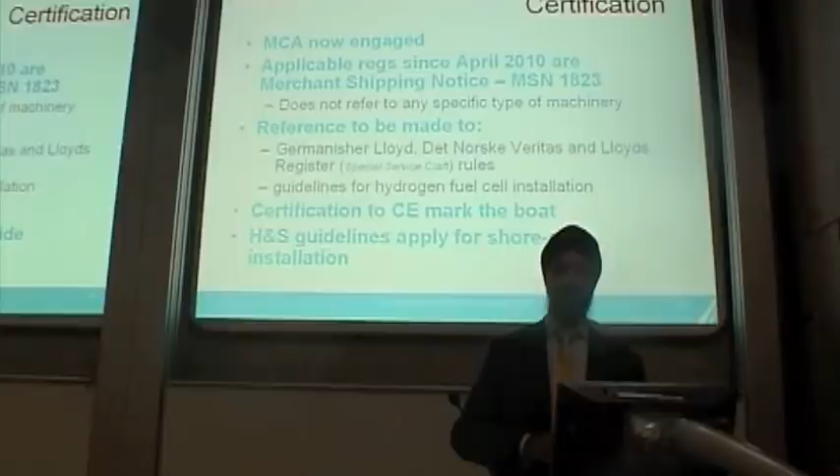Lloyd's Register said their special service craft rules are the ones that apply - under special service craft you can almost do clever and different things. So that applies, and for the installation of the fuel cell and refueling infrastructure, you comply with health and safety regulations and draw the circles, or whatever diameter you can get away with. The boat will be CE marked. It's almost there now - there's a daily conversation of several emails and phone calls with the certifying authorities, and any week now it'll get certified.

So this is the route to creating a sustainable future for us all. We create an end-to-end system, get the refueling infrastructure in place, sort out the planning permission, the certification rules, the insurance and all the rest of it.

We need the local supply industry. When I have my progress meetings with the council, I give them a list of all the local contractors we are using - the local supply industry, even the local RS shop from whom I buy lots of components. When I turn up into their shop, they are happy to see I'm keeping 3 or 4 people in a job by buying components from them. This is part of the industry.

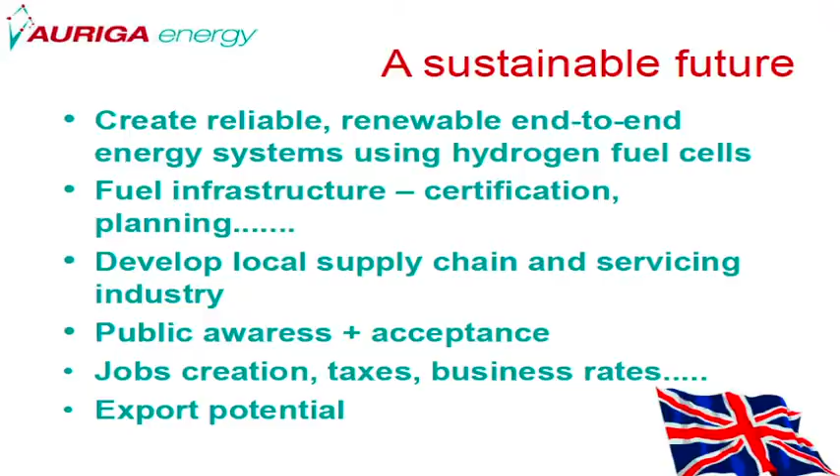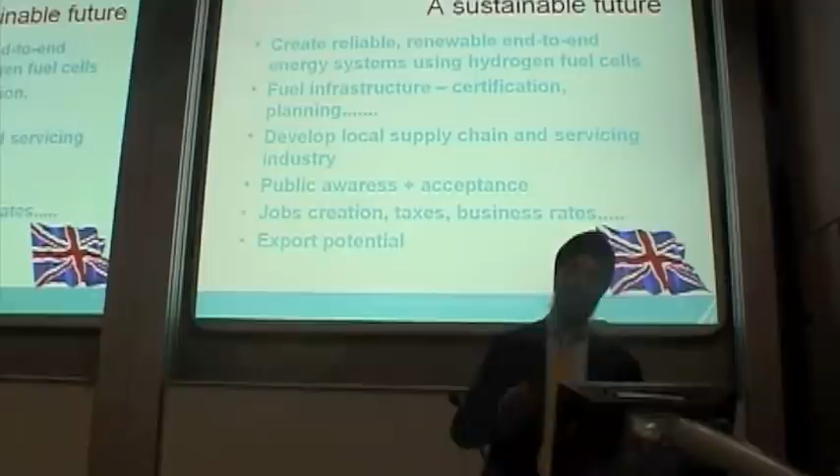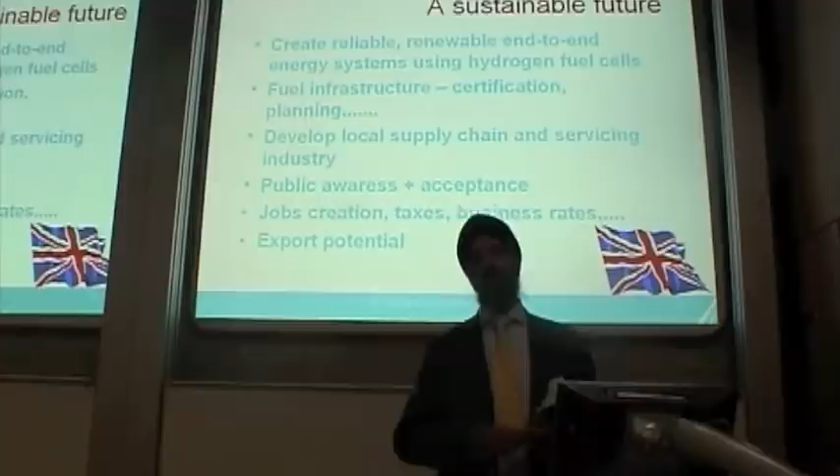And then you need the local servicing industry, which in this case is us, my company - we can handle fuel cells, we know what to do with them, we can repair them, we can change the electrical system, we can do whatever. Gradually that will grow. We're going to get the public on our side, create the local jobs, get the business going, then we can export and generate the wealth that we all think we deserve.